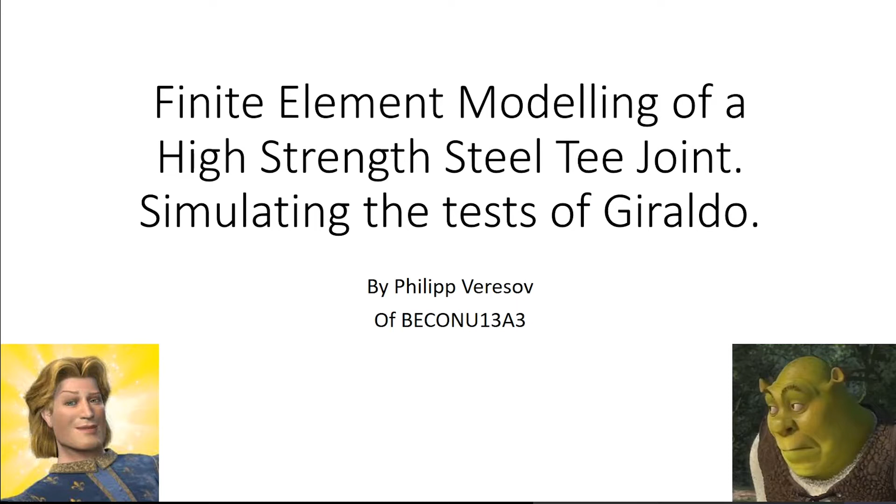And so, here is the agenda of this presentation and my thesis. We will go through what was the initial idea and what was the challenges of the thesis process compared to what it could have been. Then the problem of the software LS-DYNA, which some of you might have heard of, but we'll get to it. Then there will be results of my modeled specimens and some conclusions and recommendations for continued research in HAMK,

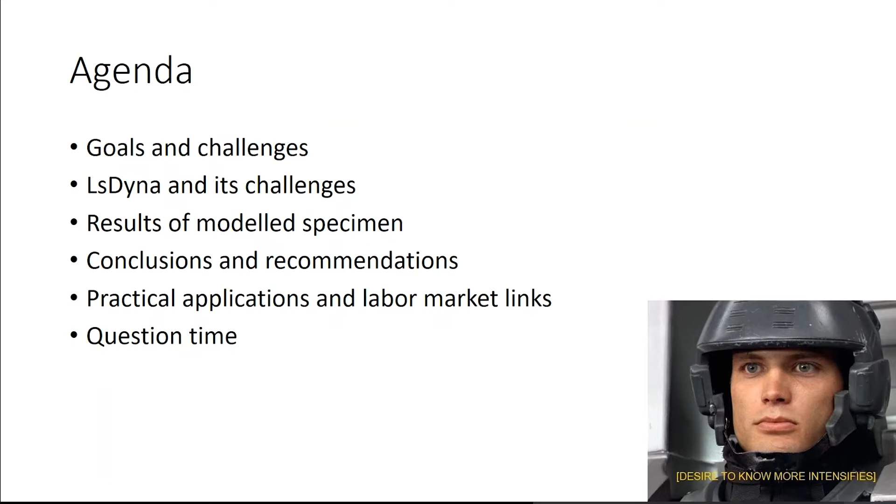and then practical applications and labor market links, but that was basically an insert for my thesis because it just had to be in there. But maybe you have some ideas about that, and hopefully we'll have some time to answer your questions if you have any. So this is what I have got.

The results of previous theses in the series, which there were 4 of, and it included a test of high-strength steel and high-strength steel welds, particularly Strenx 700, a product of Ruukki. As you might know, the high-strength steel problem is that it's extremely strong, but when you weld it and the heat input is too high, the properties of steel weaken dramatically, and the joint becomes the most critical part of the structure, and the brittle failure might occur there, which we usually don't want to have. So this is the input that I got, along with 4 theses filled with information about them.

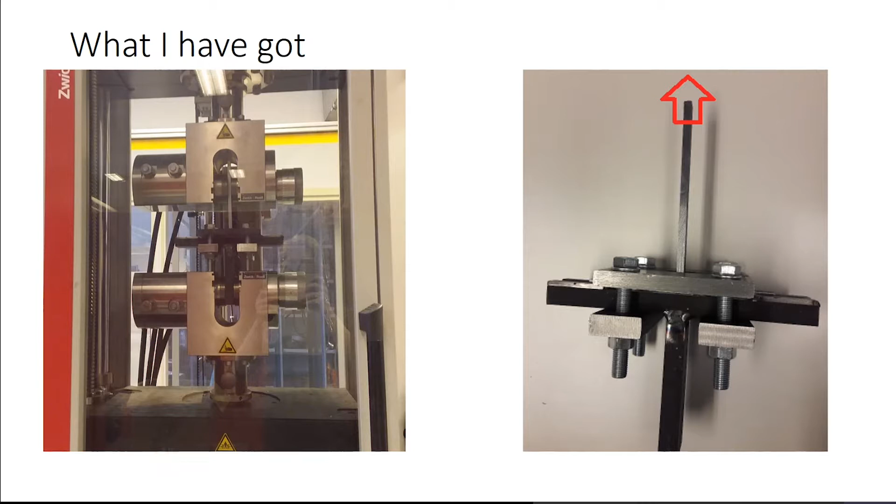And this is what I have made, a modeled specimen of the test. On the left, you can see the initial idea and division of material zones. So the red being Strenx and the base material, for which I had all the properties. Then the weld material, for which I had some of the properties and had to assume some of them. And the heat affected zones, the main problem and research goal of this thesis, because properties for it are basically undefined and a lot of assumptions have to be made. I ended up having 3 main ideas how to model it and tested all of them.

And on the right, you see part of the result animation of the calculation of this model, which shows the fault line and the main plastic strain areas.

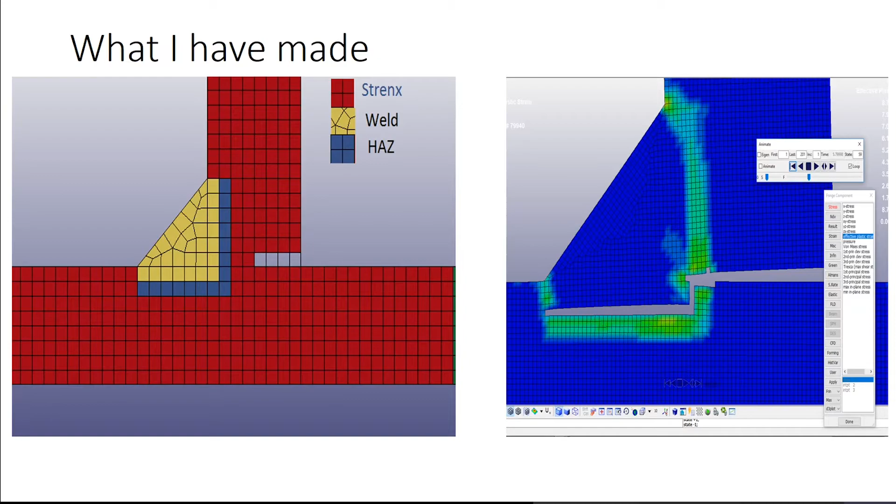Okay, here we go. So the goal of this thesis was to create a realistic model of the experiments performed by Jimmy Giraldo a year before my thesis, so in 2018, and leave as many explanations and instructions for people doing further theses in this series. At the moment, one Nepalese student is doing further research on this topic, and from what I hear, my notes are helping him, but I wouldn't expect any other answer, so I really hope that they're helping him.

Yes, and the bottom part of the slide shows the actual challenges that I have encountered in this thesis, and the primary one in the beginning of the thesis was to read previous bachelor theses. The problem with most technical bachelor theses, and I guess all bachelor theses in general, is that nobody is expected to read them afterwards. And it's pretty dense reading because, well, sadly, bachelor level students are not professional writers. And I can say the same about myself, so it was quite a challenge there.

And yes, as you have seen, the realistic model and results of Giraldo included 10 different test series with different weld sizes, and I had to choose which one was the most appropriate one. In the end, I have on my personal drive about 1 gigabyte of photos made of his specimens, measured and analyzed. But I ended up choosing the simplest one, which was a fillet weld with throat thickness of 6 millimeters. But that's not that important, really.

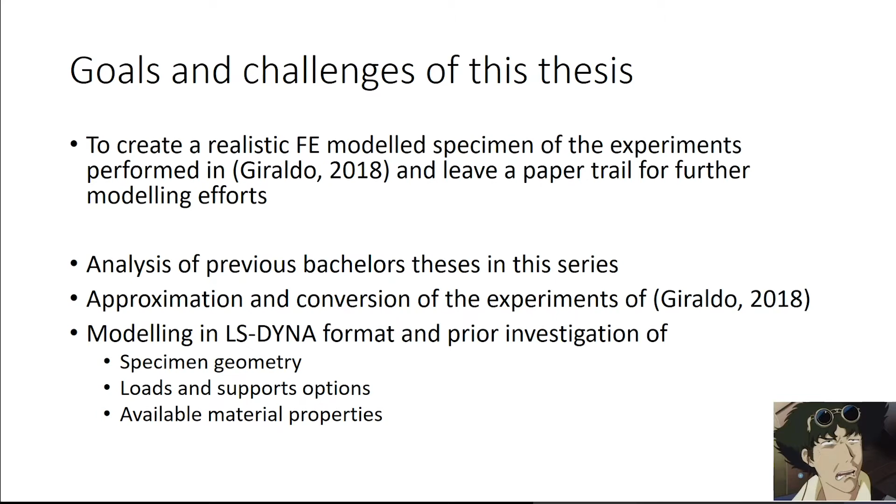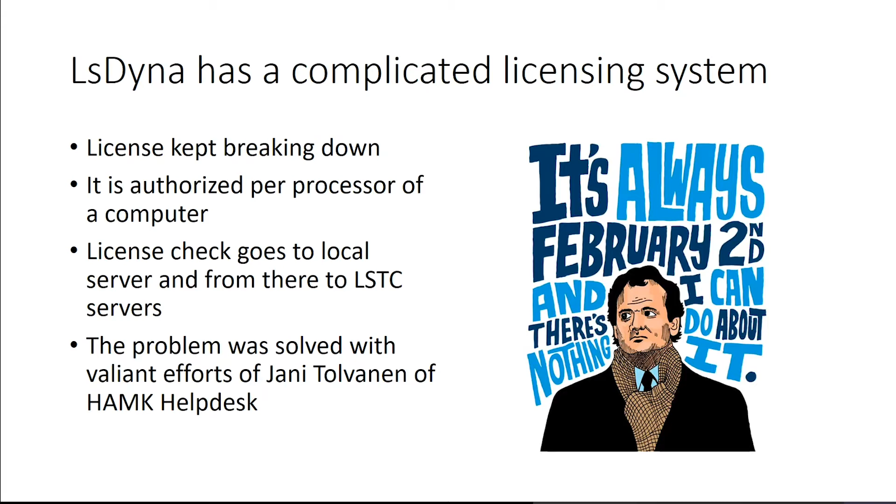Okay, yes, and LS-DYNA had a really complicated problem with itself, which was the license of it. It's fairly annoying to deal with such problems because as a structure engineer, I had no idea how to fix that and relied entirely on the help desk of HAMK, who didn't know how to deal with it at first because very few people use this program, but we managed to get through it eventually. It was quite a long process, which required me to send a lot of letters. But I guess that's what life is.

Initially, I was testing the specimens as a whole. So the height of one plate is 200 millimeters, and the width of the bottom one is also 200 millimeters. And the thickness in the perpendicular direction is 8 millimeters in each one of them. So that was the initial data.

And this was a final model. I ended up cutting most of the model away, leaving some simple support conditions. I have decreased the element size. So the initial element size was 2 millimeters. And I have shortened the model to actually focus on the critical part of it because the rest of it didn't really matter due to, well, similar material properties. You can ask questions about it later because there are quite a lot of details with those things.

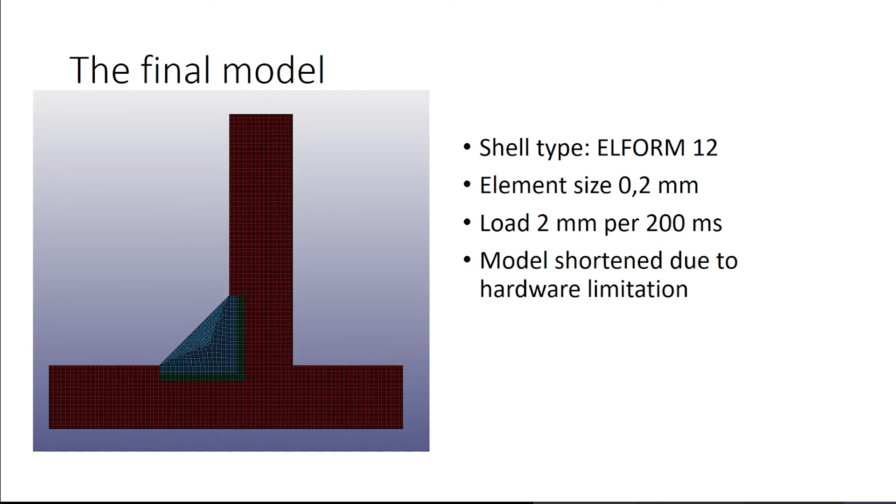And that's one of the things with LS-DYNA: it doesn't have a units of measurement choice. You have to define the relation of units by yourself and then evaluate it yourself as well. So if some mistakes have been made in the definition of material properties, it can make results unusable from a mathematical point of view. So you cannot really compare it to anything else.

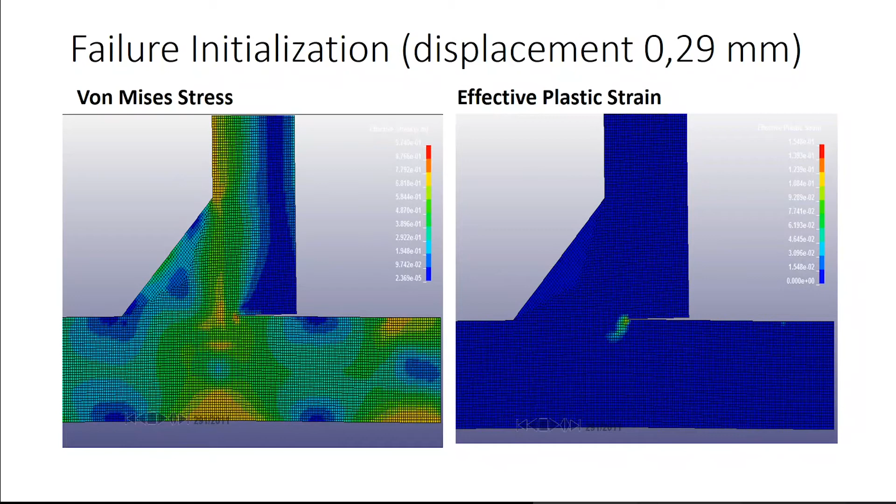It is relevant because when I compare my modeled results to the experimental results of Giraldo, displacement is a big part of it. So at each slide, I'm going to give you about 10 seconds to look at it and try to understand the process. So here we go.

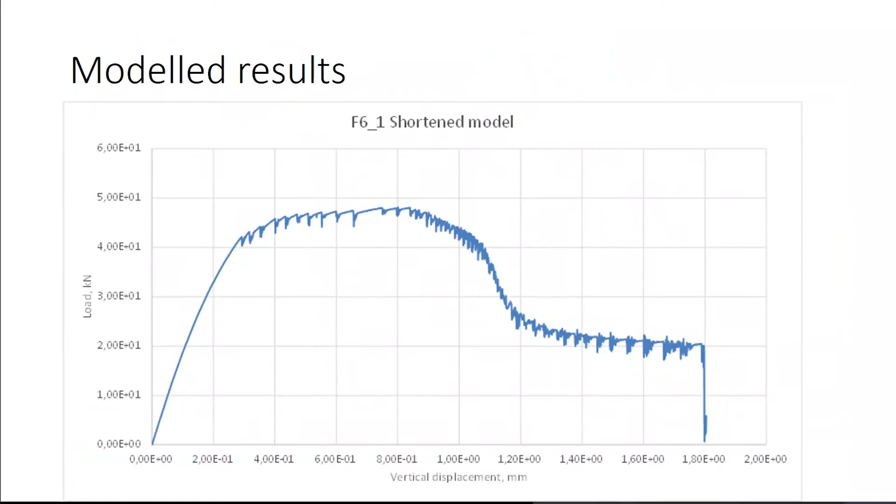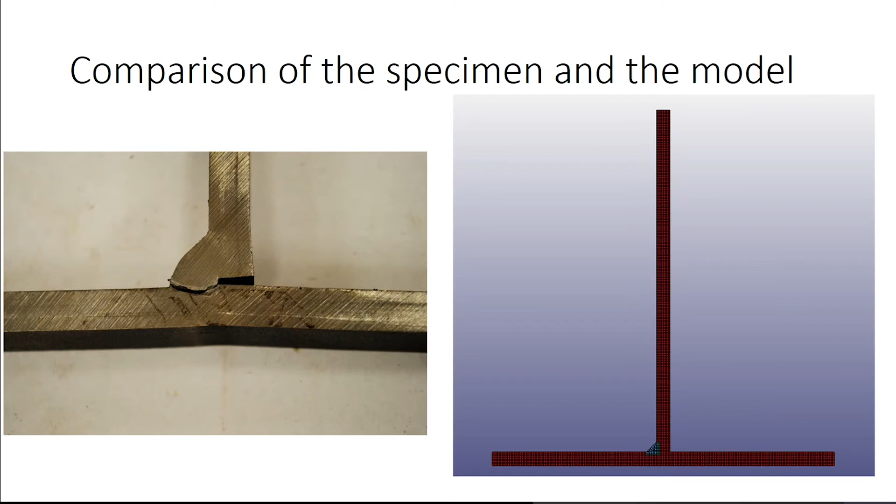So these were the results that I got in kilonewtons, and the displacement, as you can see, at 1.8 millimeters of displacement it fails completely, but the actual failure starts at about 0.8 millimeters. Such a small displacement is a result of very strict boundary conditions, the support conditions, restricting any movement in the bottom plate of the welded assembly. And the failure load is about 48 kilonewtons in the model.

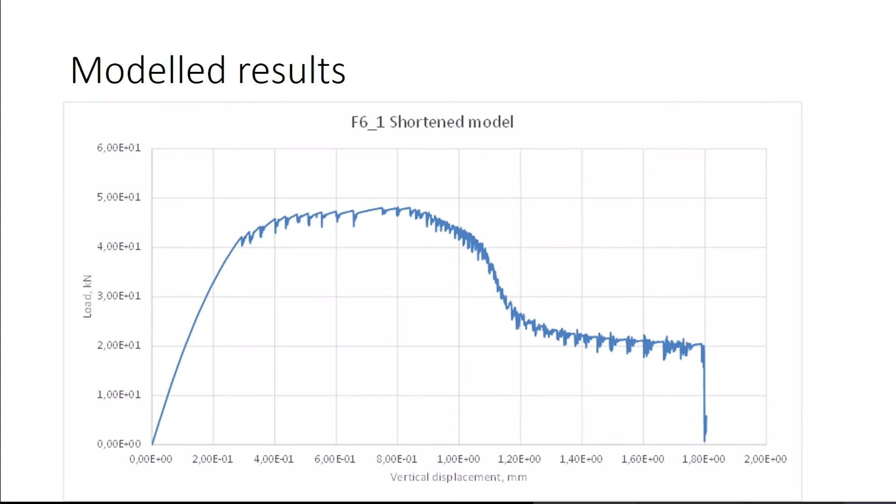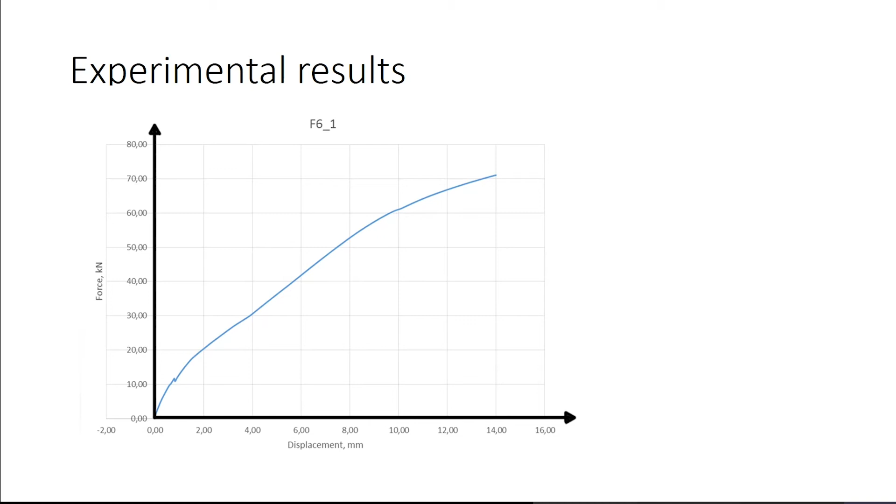And now for the experimental results. Experimental results show that the failure happened at 70 kilonewtons and a displacement of 14 millimeters. But this displacement cannot be trusted because the test assembly allowed quite a lot of movement and had other imperfections. But this is what the next slide shows.

So all in all, I'm quite proud of the work which I did, even though the final results are not exactly as they should have been. Though considering the number of imperfections and uncertainties included in the initial analysis, which includes that the test results of Giraldo cannot be truly verified because the test arrangement was imperfect, but that's already been dealt with in the process of my thesis by another bachelor thesis, which was finished after I was done by Mr. Antimonik. You can Google it on Tezels if you're interested in such a thing. So the next test in this series will probably be better.

Or so I hope. And also the heat affected zone properties are a very varied topic. So the final model uses the model of heat affected zone to have 90% of strength of parent material, which is a model suggested by Eurocodes for calculation of such things. But it is not entirely true as I understand it, because my model doesn't show differences in heat affected zone formation in high strength steel compared to normal carbon steel, because I suppose that 90% is more about the carbon steel thing.

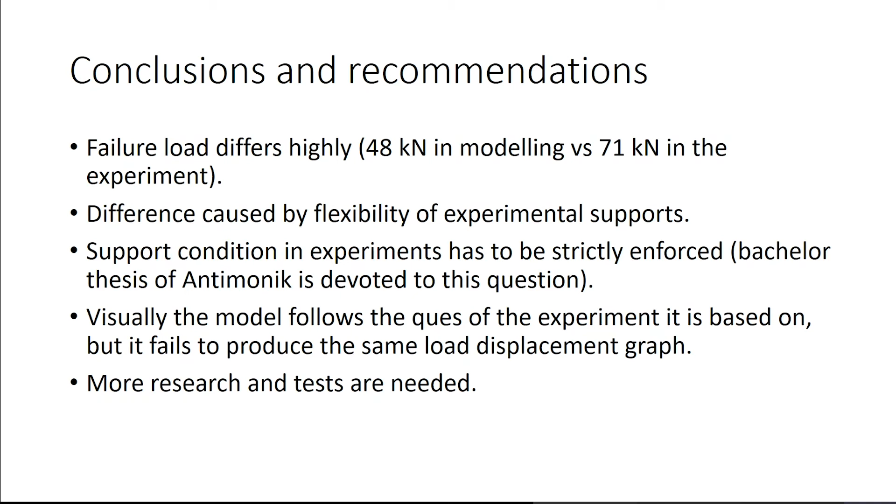So, practical application and labor market links, it was written 10 minutes before my final presentation 1 year ago, so it's, well, it's not really content filled. But I guess all of those things are true if you think hard enough about them.

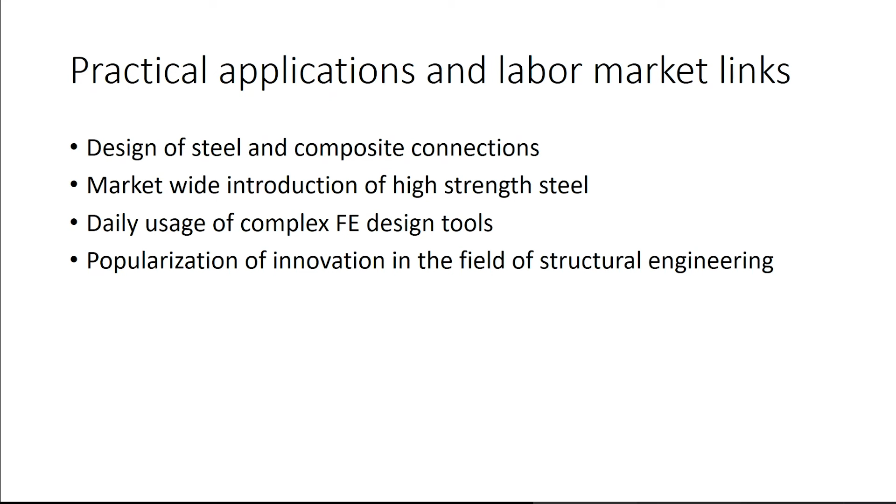And I think it's question time. As Confucius once said, wind is basically air. So if you have any questions, I'm ready to explain them down to the basic concept as far as I understand them. Thank you for your time.